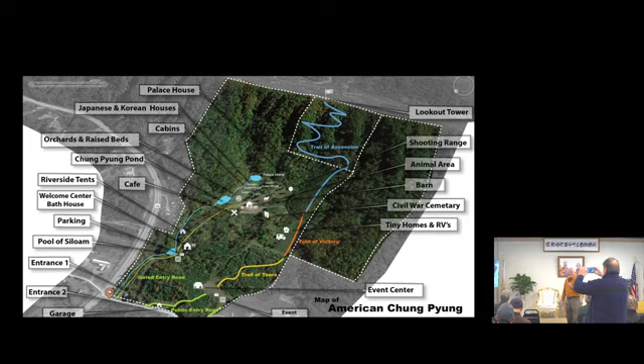Everything else wasn't there. As you may know the history, it was really the pioneers of Chung Pyung that got out the machetes and tools to clear away the land. Big hand to all of the early Chung Pyung volunteers that paved the way.

But really, this whole project was based on Father, early on, before finding the land. Of course, Neil was very instrumental in researching and trying to find various options for the King to look at. We looked at a lot of properties all throughout the Smoky Mountains, starting down by south of Maryville and Knoxville, that whole corridor. Many days, weeks of unsuccessful findings.

There was one left on the list that we could take a look at before going back up north, and it was really a miracle that this particular property surfaced to the top. It was on a morning - we were going to look at one more property before heading north, and this is the property. It was clear that God and True Father wanted this property, because right away the King was super excited about it. All the other properties we looked at, he wasn't that happy with.

But this one, he said over and over again, this looks just like Korea. And as you know, the Korean Chung Pyung has fallen into Satan's camp. So part of what the King has to do, under True Father's authority, is create a Chung Pyung that can really represent heaven and earth. This property is very important on so many levels, but this is really where heaven and earth come together. This property represents that - it's a piece where God can claim as his own.

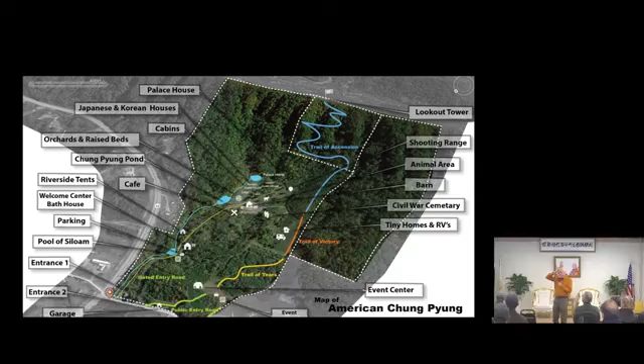So we did cut out a piece. Let's go to the next slide - actually the next slide is Google Earth. Shinduk, you can bring up Google Earth and show people the general area.

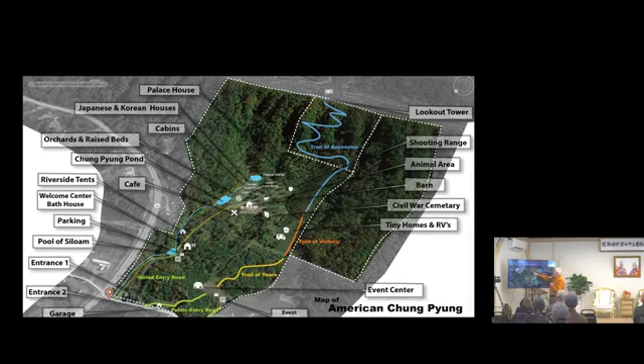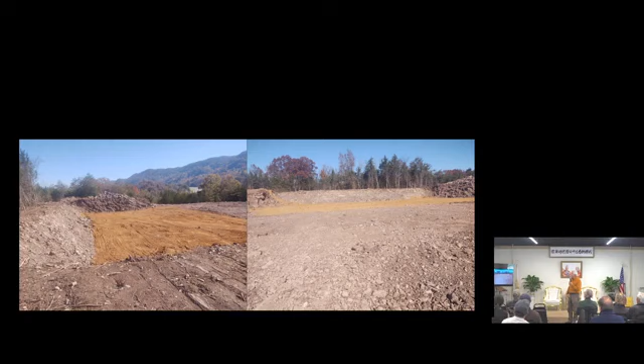Okay, next. Found out that we hit solid rock, so we'll have to redesign this, but this gives you a basic idea. A lot of frontage - this is facing the mountains here, and that's where that cutout area was. This is the parking area over here, the entrance. We've since modified this a lot, but we haven't gotten a new design yet.

So the people that are on the team - an important person is Peter Van Gelderen. He's like a design artist, and he comes up with these artist renditions, so we'll be asking him to redo that based on what we know now.

Who else am I missing? Paul? Paul Addison? No, he's retired, but we might get his advice. We're going to get Neil's advice too, so there will be other people involved. Doug Williams - yeah, he's on the financial committee.

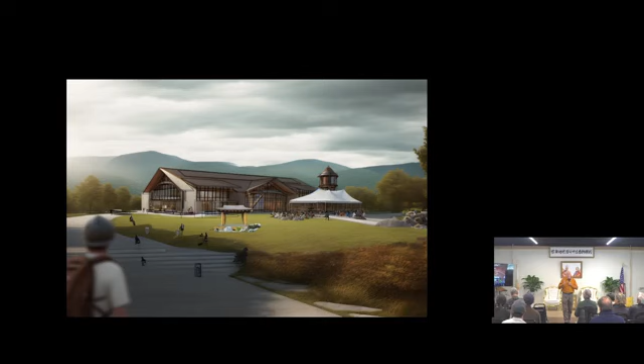The king likes the idea of a wood interior, kind of like the True Parents Memorial, that kind of natural wood interior. It may not look exactly like this because this was lifted from another building, but just to give a basic idea, the inside will be like a timber frame, using what they call glulam beams.

Joe has done a lot of research on those structural beams, and they can span 60 feet. The outer dimensions of the building are 60 feet by 120 feet, two stories, so it's really a 14,000 square foot building including the basement—about 7,000 per level, plus upstairs like the tower. The capacity is somewhere between 200 and 300, and outside there's a lot necessary for a structurally engineered building. I don't know what these things weigh, but I'd imagine about 20,000 pounds.

They're really heavy, and you want to make sure everything is solid. Before, during, and after we get everything, an engineer is looking at it and it gets stamped and certified. That's the only way, and the king and Kook Jin are both very adamant about this, because we are responsible for our community, and everybody's contributing to make this happen. So we want to make this not only a stunning, beautiful architectural building design-wise, but safe for hundreds of years into the future.

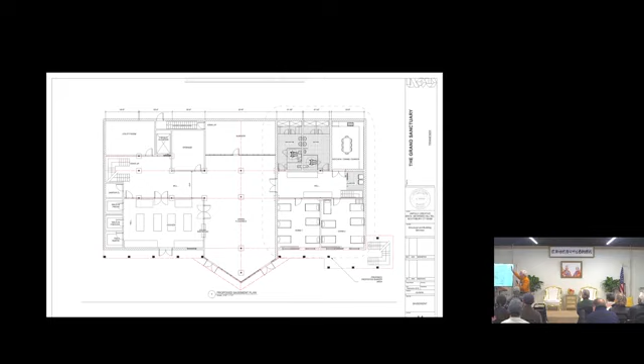Okay, next. Can you make this any larger, Shinduk? Maybe right to larger. Okay. You able to move it over? Yeah, okay, there we go.

That's pretty good. Okay, we'll start with the utility room. When we first drew this, we didn't have a utility room, so that's why this meeting is important. It was at one of our building committee meetings that someone asked, hey, where's the utility room? That's actually a very important part. That's where the HVAC system goes, and a lot of the plumbing, heating, cooling, and electrical boxes.

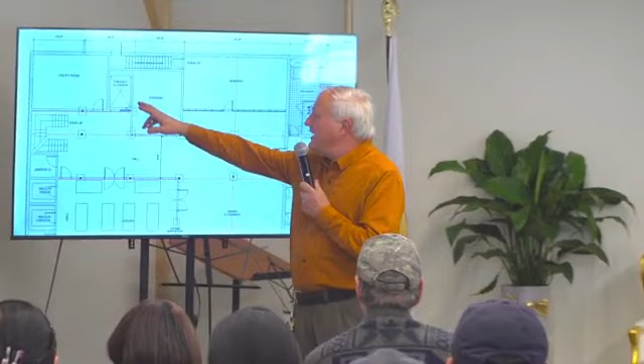The freight elevator will be used, say, if we're having events upstairs and we need tables, and all the tables are stored down here. So we'll probably have a door here, and then the load up and egress for anytime there's a nursery, there needs to be an escape way out in case there's a fire or something like that.

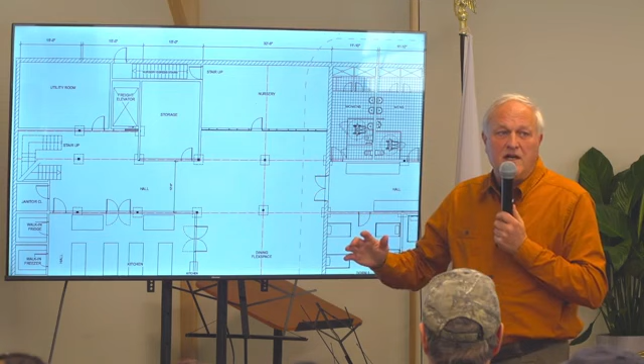We tried to design this in such a way where there's a lot of flex space, meaning it can be used for multi-purpose. So maybe the nursery might be divided in half with one of those, what do they call those, accordion doors, right? So you can put it there, and then you have 2 distinct rooms.

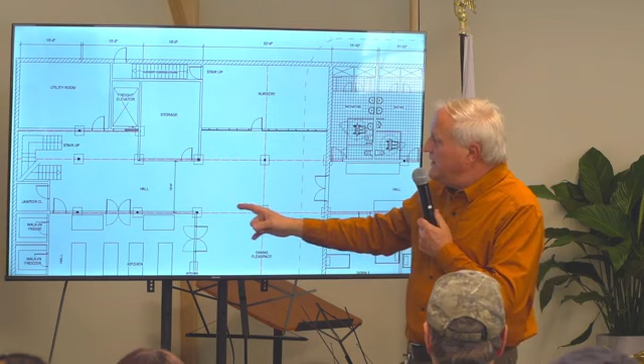This is the stairway. When people come in upstairs, then they go downstairs and they go into this area. And if they want to go upstairs, it goes right into the foyer, which we'll show in a little bit.

Janitor's closet. And then the kitchen will have a walk-in fridge, walk-in freezer, and food pantry. We'll get people that are specific, get Elka and others involved, that's what they do. And maybe we'll even get some advice from other food service people as well to design a kitchen that really works well.

So again, the service elevator is over here, so you imagine a lot of food might be going upstairs. They go right from the kitchen over to the elevator and up with food.

This is a dining flex space, so like now what we do is everything in this room. But in the future, food will be served, and this will be the dining space, so people from upstairs after service will come down, and food will be served in this large area.

This is quite large too, like this is probably 40 feet by 30 feet, so it's a pretty big space. This is about 40 feet here and 25 feet wide, so it's a little bit bigger than the Welcome area.

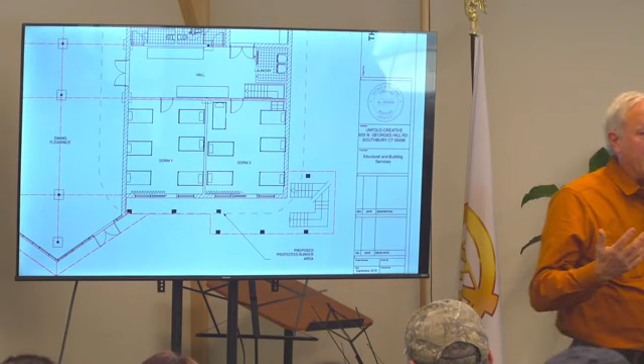Designed for the Kingdom Academy. You can move this over a little bit. But it's also kind of like a zone here. So say if there's a nuclear war or something like that, then this will be a safe haven for people to come, especially the king's family, a place where they could have their own bathrooms, laundry, and sleeping area. This is kind of a fortified zone, with a kitchen and dining area, and bathrooms.

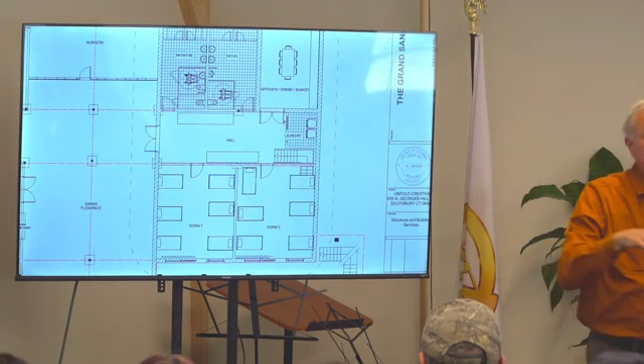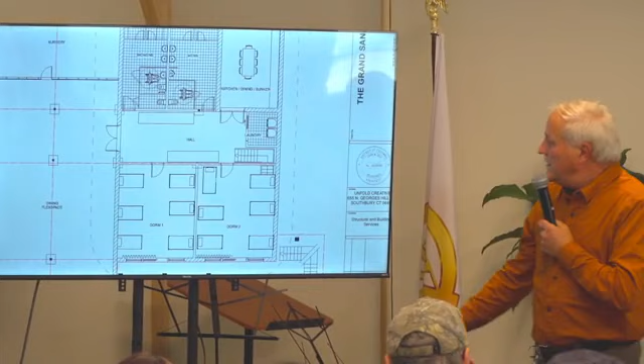But take away that worst case scenario, it's used by the Kingdom Academy, again, the laundry, bathrooms. Okay, let's go to the next slide.

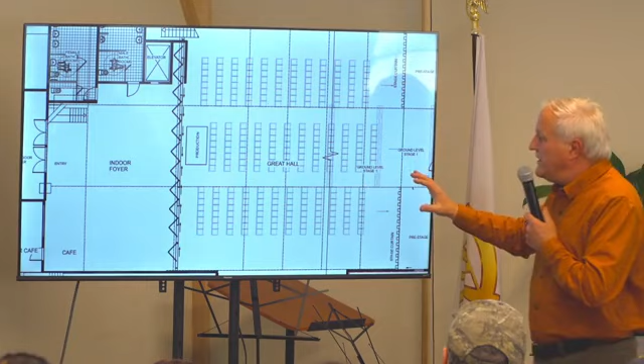So those stairs, this is where there will be a flex panel again, so that say if there's 300 or 400 people, this can open up and be part of the main Great Hall. But if it's a regular service, this is probably closed. We're even thinking about having another flex accordion panel here so that smaller events can be held.

We want to make this building multi-purpose. So say if we're having an event that's 60 or 70 people, you won't be in this huge hall feeling dwarfed, but we'll be able to cut it down to size and adjust it.

So we've got bathrooms upstairs. This is where the elevator comes up. This is where the nursery escape is. And then these are the Great Hall.

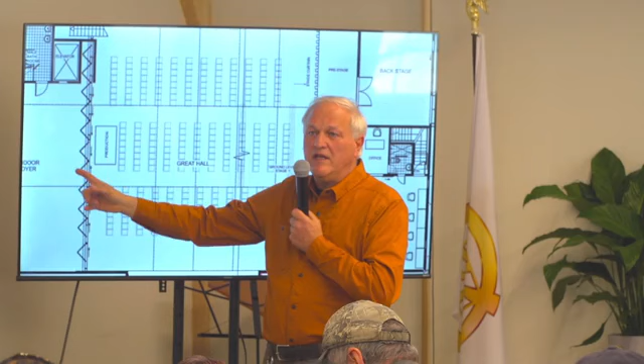Bathrooms are up there, and then there's a curtain here and a curtain here, and then this will be the staging area. This is production, this is where IT, sound, and video will be.

And this will be kind of a flat stage, or we could have the stages that we bring in, that are up about 18 inches or 2 feet. Portable stages, so we could have that. This is a backstage area here for storage.

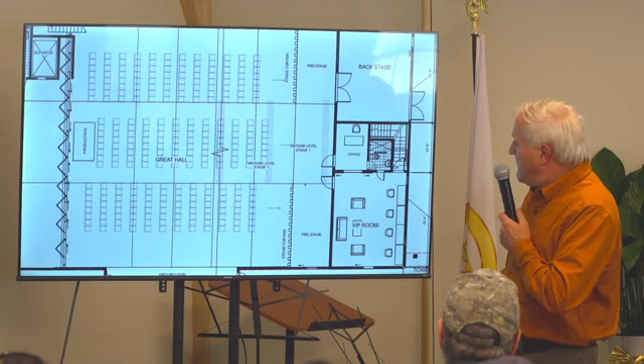This will be the King's. This would be more for the VIP room and also offices. That's what these are. These are like offices. So we kind of combine, like we currently at Sanctuary Church in PA, we have the VIP room and offices together in the back. And that's what this would be here.

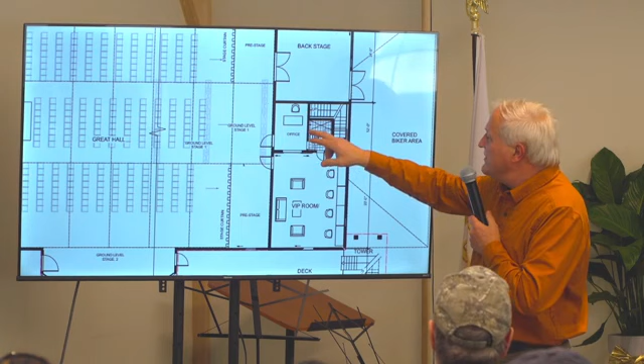And then the king has his office and bathroom here. This is a public bathroom back here. And then the bar, so that when there's a biking event, they can use this VIP room as well.

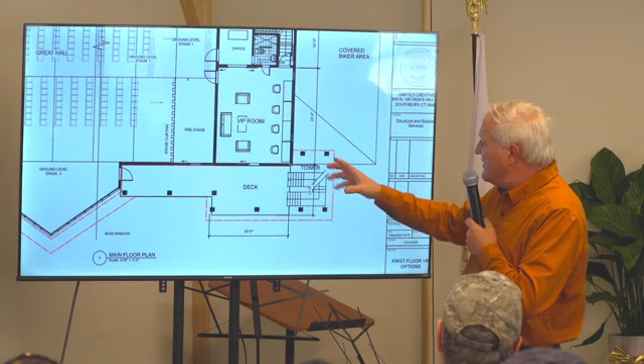And then the tower, the entrance to the tower, and you can bring this up a little bit. I'm not sure how that's going to work yet, but a lot of the details still have to be worked out. There'll be some kind of, I guess, a deck here. A lot of this is very undefined at this point. The tower is very undefined at this point, but that's going to be a really important part of the building is the tower, in terms of really creating a defining character.

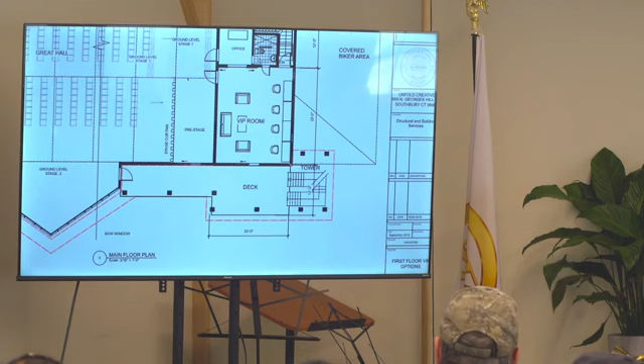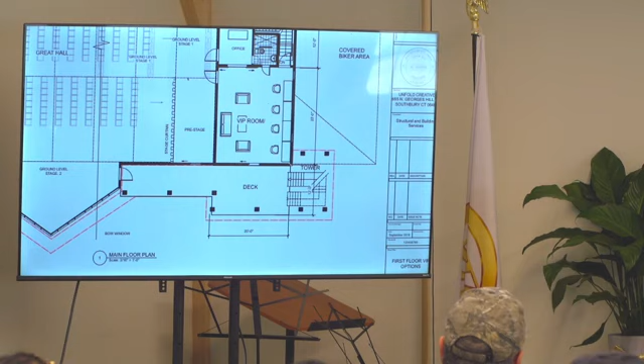So when there is a sound, Robert will be with the sound, you also have a door that opens and closes on the back. That's what you say, that you will adjust how many people. Oh yeah, yeah, this is where Robert's knowledge will come in. Yeah, we haven't worked out the details. We're going to call in people who have a lot of experience in this area.

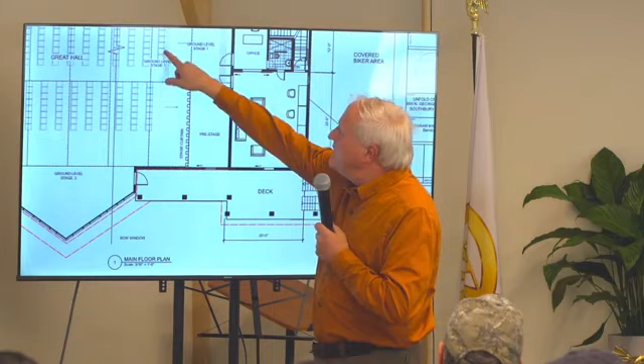A lot of this stuff right here is for lighting, you can see this. Can you bring this down a little bit? Yeah, so this is truss. Truss, is that what they're called? Truss is for lighting, to get proper lighting on the stage. And again, Robert will have a lot to say about all of that.

So when we have VIPs, not only the king, and say President Trump is coming, and we need a place for President Trump to enter into that VIP room, I don't see a back entrance. I'm just wondering, maybe there, some way to get in there from just, like from here. Yeah, no, you're right, that needs to be some access there. There's access here to the backstage, but no access yet over here.

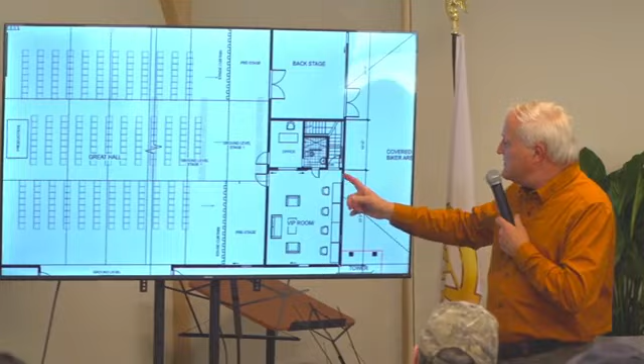What's the backstage area used for? That will be for backstage stuff.

Well, if you got the stage area flat, then you want to have a stage, 18-inch stage, you've got to have a place to store the stage decks itself, staging decks, sound equipment, whatever. A lot of storage - it always gets forgotten about, and there's never enough of it. Absolutely, been there, done that. Yeah, whatever you think, if you think you have enough space, you're wrong. That's the golden rule, you always need more space.

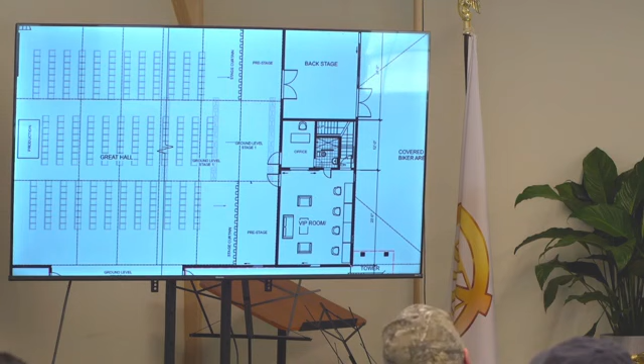It's nice to see it wide, open space. That's why, and we'll probably have shelves all around here. Like Juan mentioned, for Holy Day items, we're always tripping over the stuff now. It'd be nice to have shelving units where it was a dedicated spot, nobody moves them.

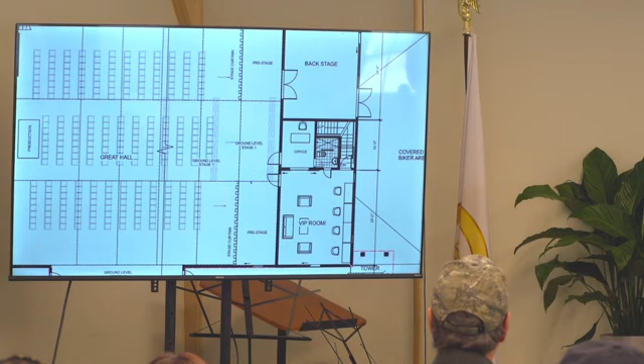So the first step is to get the soft costs dealt with. We have enough money right now, thanks to Cookchinam - he donated $100,000, and somebody else donated $100,000 from Japan, and then other donations. We have about $250,000 to start with, which sounds like a lot, but this project, Cookchinam thinks $4 million for this project, and he has a lot of experience building stuff. So I think I was originally thinking $2 million, but he's convinced me that it's probably closer to $4 million. So, what's that? Inflation, yeah.

So the soft costs will probably be, I don't know how much, but probably $50,000 or so. And we'll want to make sure before we do anything, we have the architectural - now that we're committed to having all these properly certified and stamped drawings, we want to make sure that's all in place. That's why it's important for us now to put the time into it, because once they're in the drawing stage and they're stamped, it's very expensive to change those. You have to go through what they call a change order, and those can really add up. Those can really inflate the project.

Every time an architect has to go back and change something from the original drawing, the costs keep going up—construction too. So we want to make sure that once the drawings are done, we show them to Joe, to our electrical guy, maybe Byron, and our plumbing guy, whoever that ends up being. We want to let all the subcontractors look at the drawings and make sure they're comfortable with it. Maybe they see something the architect missed on the paperwork, then we can begin with confidence.

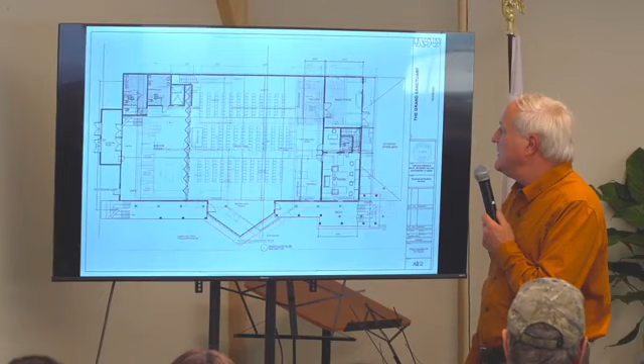If you go back to the other drawing, Shinduk—these are all footings right here. So these are really what hold the building up. These are very important, you've got to get those right from the beginning. That's what a good architect will do—he'll study the weight of the building. From these footings, you can start making a plan on the arches that go above the glulams, or the timber frame, whatever we end up using.

And of course, Joe has already been working on a lot of this on the actual building side of things. He'll be leading the building side, and I think he'll also possibly be doing the cement structural stuff. He's been certified recently for—what are those cement things called? The ICF foundation, which are like big blocks of foam that you build up and then pour cement into, and that's what creates the foundation. Yeah, the foam—it's like a foam box filled with cement. I'm sure I'm getting all the terminology wrong, I apologize, but there's a lot of other people involved who know all that stuff.

We'll try to address any questions people might have. We hope to start pouring in March or April if we're successful getting all the drawings done in that time. That might be unrealistic—I'm not exactly sure how backed up everybody is on the architectural and structural side. But like I say, we have enough money to do the drawings and the foundation work. From there, we're just going to have to fundraise and get the word out.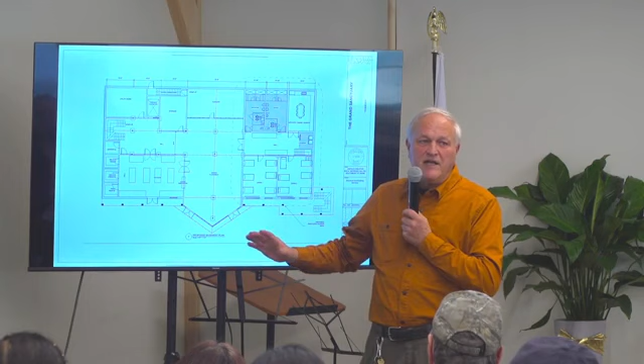This is a very scenic area. If you remember that grassy area, we want that to not be cluttered with cars, but it's a drop-off only area. Everybody will have to go very slow because there'll be children playing. But for the turnaround area, we'll make a nice little garden area here. Probably maybe the fountain can go there.

The view of the highway is like from the tower. You'll be able to see the highway really well. But actually, even from the main floor, you'll be able to see the highway. Over here. Well, the highway's over here.

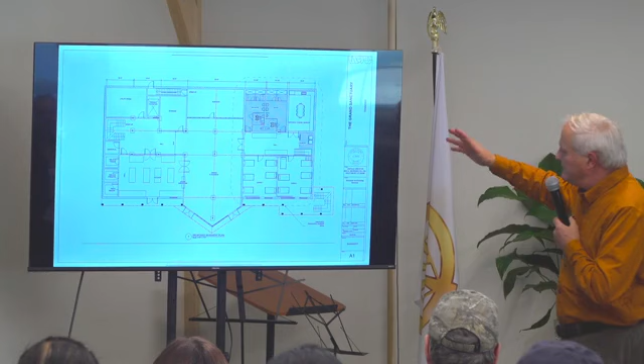Yeah, so we'll probably continue doing jiu-jitsu training down here. The Welcome Center, we'll have to see what the Welcome Center's doing in 5 years. Maybe I don't know, I think a lot of stuff's going to be happening here. These have showers as well.

The mezzanine? Well, we talked about a mezzanine, and I'm not sure if we need a mezzanine. It adds a lot of cost to the project, but I think that's still open for discussion.

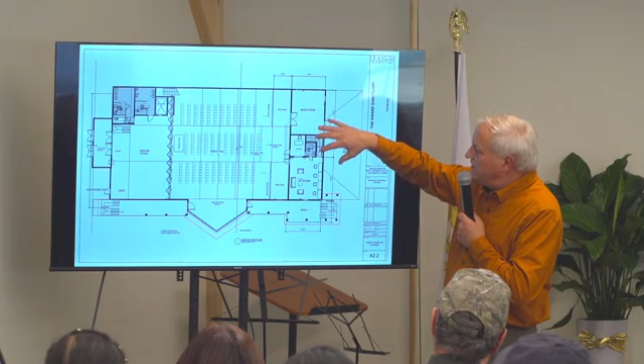We actually talked about this, can you go to the next slide, Shindak? We talked about a mezzanine level here, but you would lose the cathedral ceiling in the foyer area if you did do a mezzanine, and it adds cost to the project, so I'm not sure if it's needed. There was also talk about a back floor here where maybe the king's office can go upstairs, overlooking the grand hall.

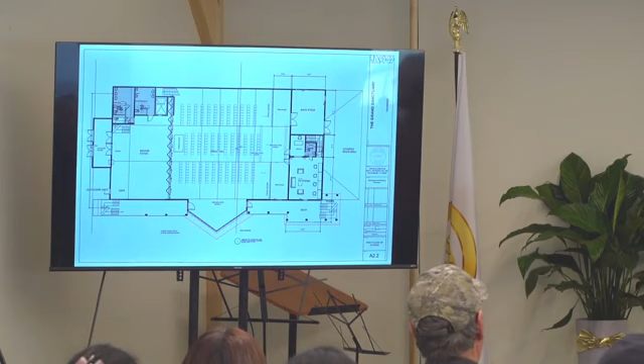Mr. Kyle's asking if you could repeat the question. Oh, okay, yeah, I can repeat the question. So there was a question about a mezzanine, and that's still open for discussion if we want to have a mezzanine above the indoor foyer.

The argument against it is cost. Do we really need it? We have a lot of space down here, especially if this is an accordion wall. You'd have a lot of space. What's that?

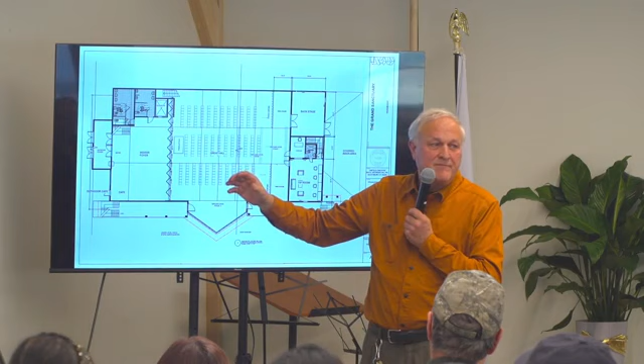And so the mezzanine would be nice from a visual perspective. You could design the structural elements to allow for a mezzanine to be added later, if it becomes a necessity.